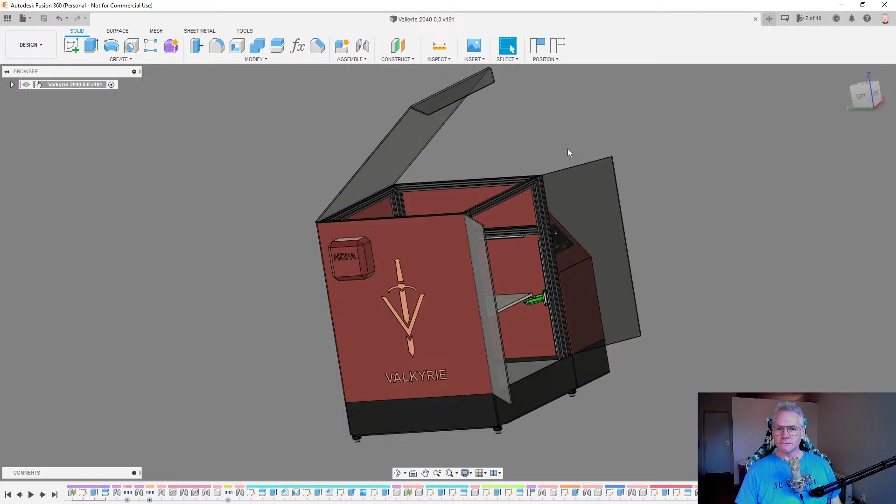We have been discussing, we can have a look at the CAD model. So here is the current CAD model. This side thing, cabinet, pod, or what you want to call it, is probably going to be a little bit different. The touchscreen is not going to be here. If we are going with a touchscreen, we need to place it like down here or up top here somewhere. Let me know what you guys, where you would like to have it. Also take into consideration cabling, cable management to the screen. We want that to be as clean as possible and as simple as possible.

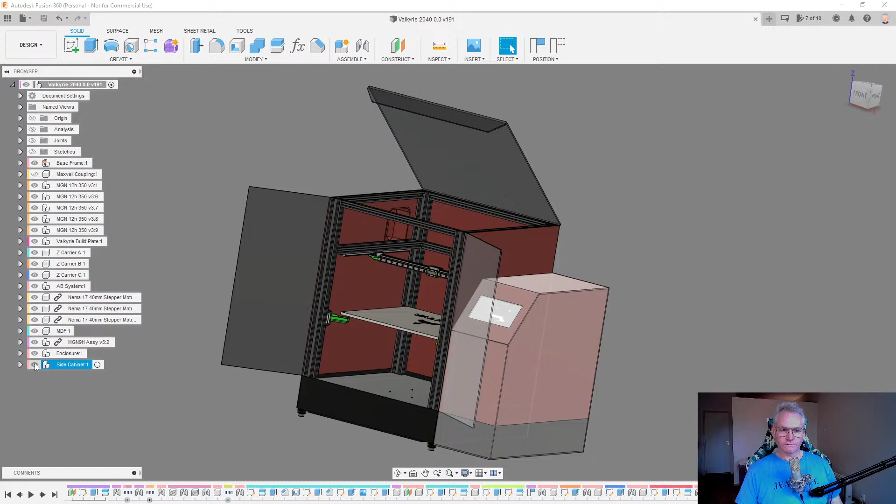So let me just get rid of the side cabinet for now, and also the enclosure. We're not working with that right now.

So this is what we got. I currently have in the bottom here an 18mm MDF. Comes out at about 3.55 kilos, which adds weight to the base of the machine, which is good for stability and also lowers the center of gravity.

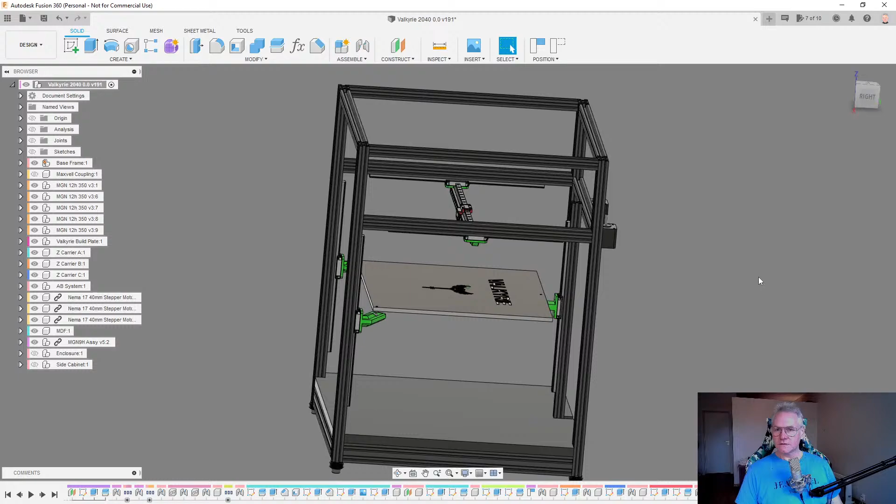So my concerns right now about this frame is the joining. We have been talking about joining, and the community have been asked to apply blind joints. We're talking about blind joints. We're talking about just basically a panhead screw inside here.

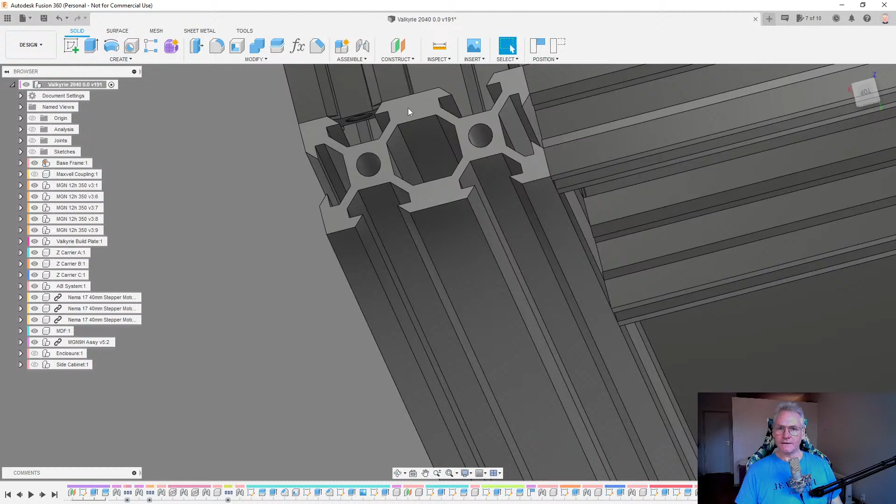I can add a screw so we can see it. It's more easy to show you rather than to try to explain. So let me find a screw.

Should be in, probably I don't know, I don't remember where I put everything. So yeah, here we have a M5. So let's do M5 by 10. Let's put that inside here.

Just need to do that actually in the frame. So let me activate my frame. And let's do like this. And I can show you.

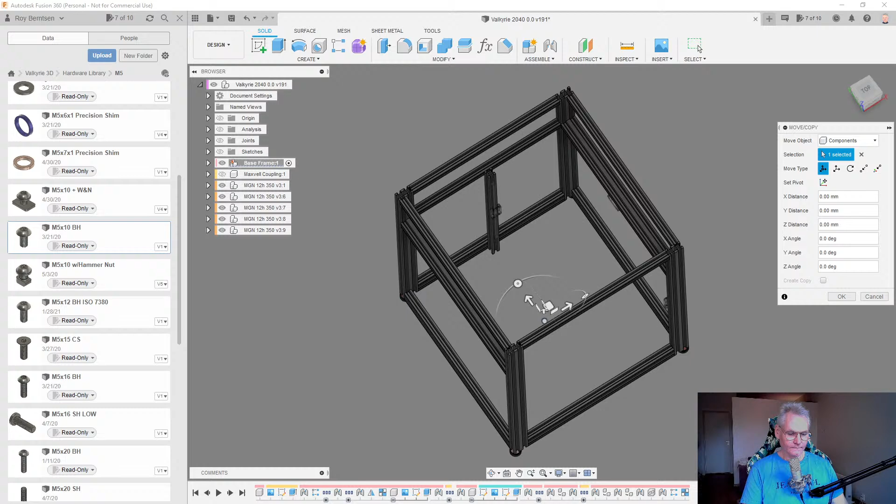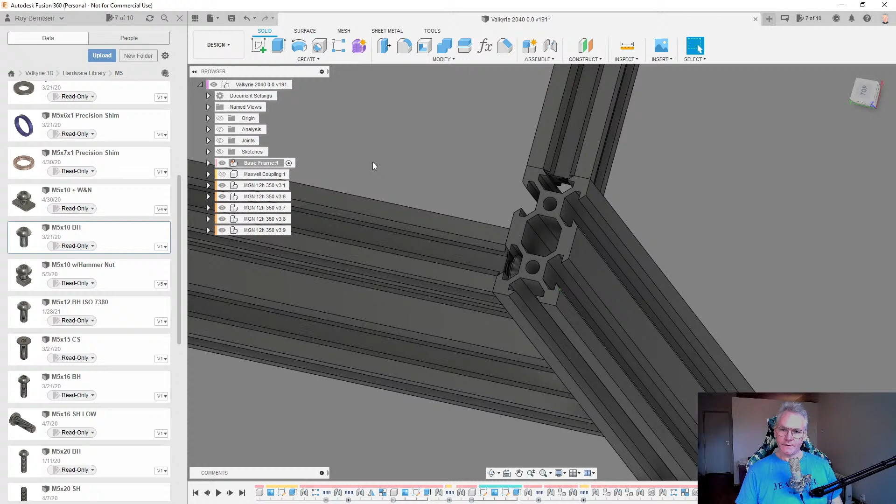So adding this guy to this guy here. Of course, it requires that the extrusions are tapped. And it would look like this. This is a typical blind joint with only just one panhead screw. We don't need a washer here. We could have a washer, but yeah, it's probably good without also. So it saves a lot of time doing this and a lot of hardware joining the frame like this.

But there are challenges. Mark Bridgewater from New Zealand just did some tests, and it's not perpendicular. It's not the angle is not 90 degrees with this kind of joint. It requires a very, very precise cut, and some say milling as well, to get this correct. So this was my initial plan. It was asked for by the community, but if it doesn't make the best possible squared frame, we cannot use it. We can maybe mix and match.

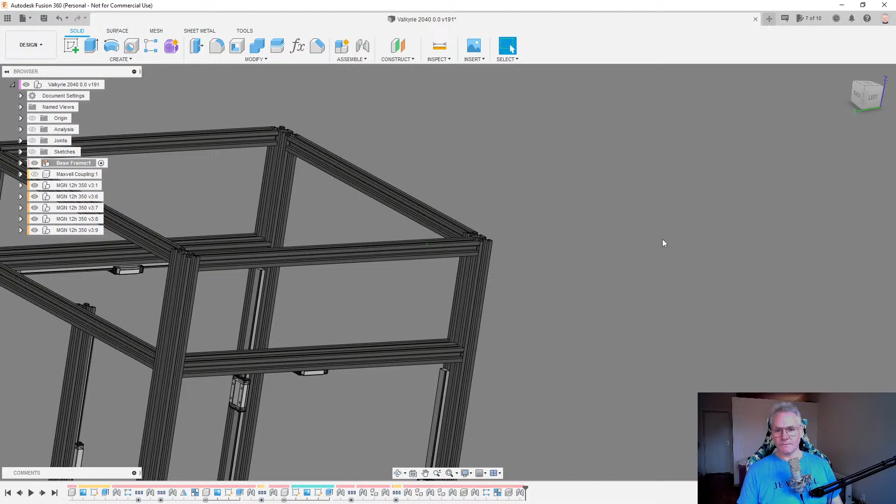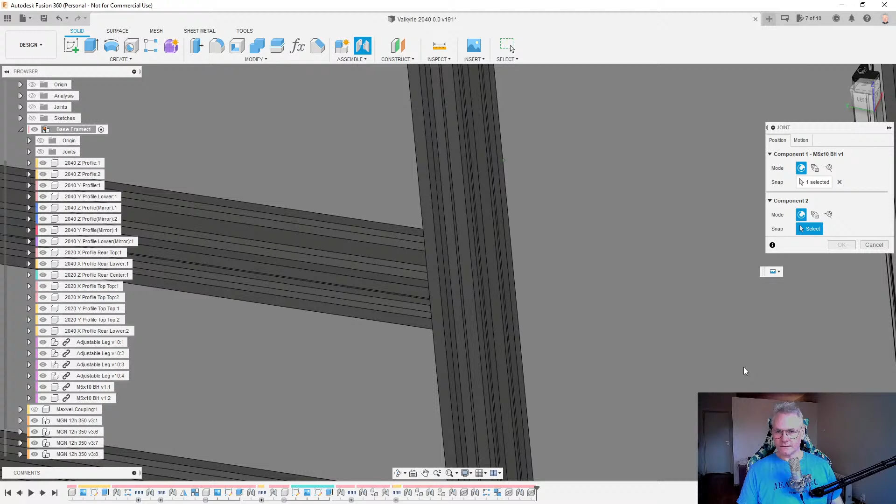Maybe we can use these guys. Let me put one more in. So let's just see if we do put this one inside here. Yeah, I cannot access that right now, so let me just hide this one and put the screw in.

Like that. This with two screws here in the 2040s, it should probably line up pretty good, but yeah, still we don't know. So let me put a bracket in. I'm not sure where my brackets are. Let me find a bracket.

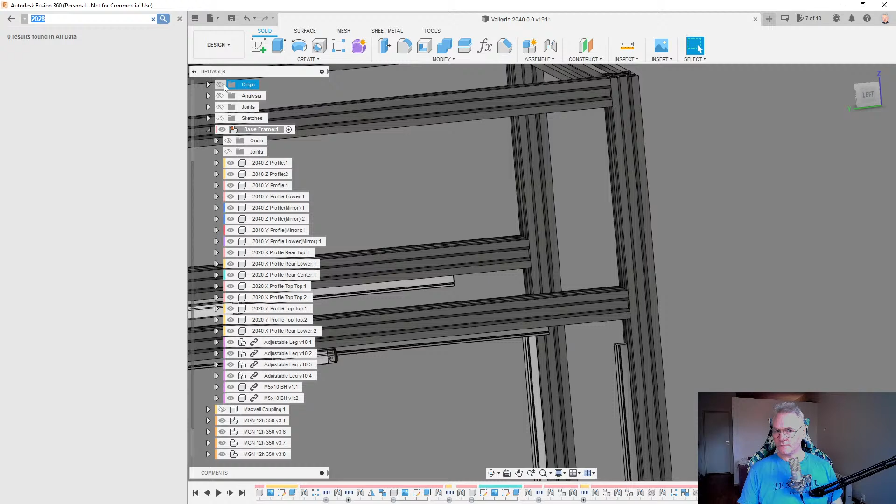2020. Okay, so I don't have those in this folder, this project. It should be somewhere else.

Here we have the 2020 L bracket. So I'll just copy this one out. Here we got it.

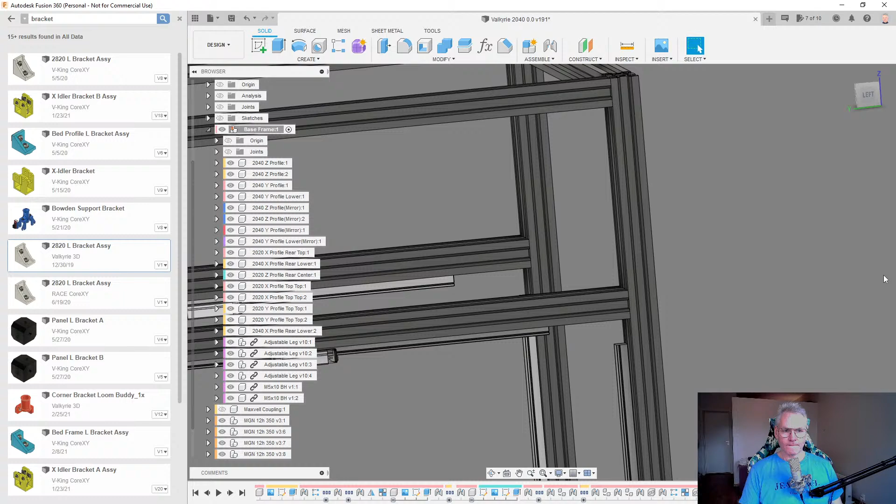It's all done as an assembly, so there's a lot more hardware going on here. We have the bracket, the M5s, washers, and the T-nut. Yeah, a lot more hardware, a lot more work, but I've used this before. This is my third or fourth 3D printer design, and I've been using these brackets earlier, and they have made a perfectly perpendicular, or as good as it gets, result regarding the frame squareness.

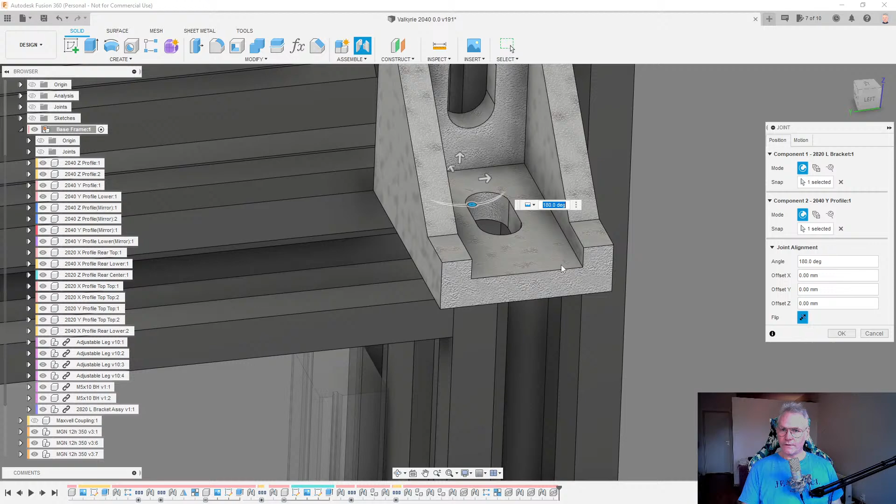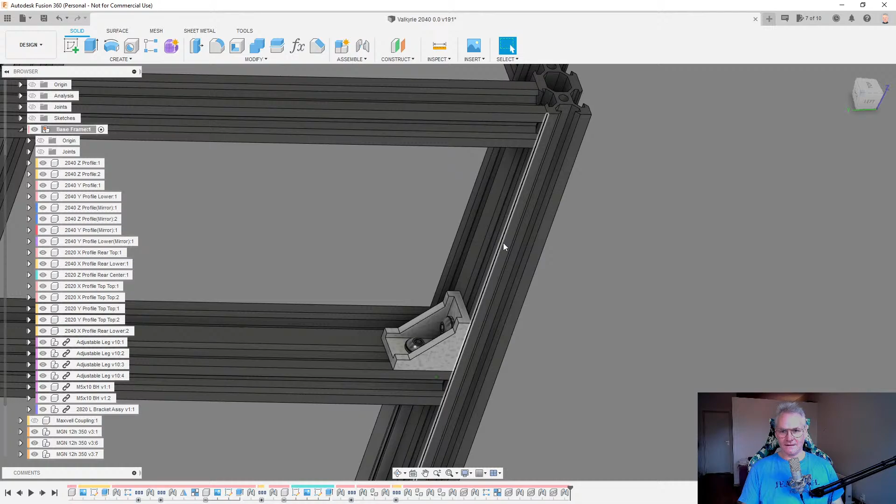So we could put these guys inside. Maybe just need one, or we could add two. I don't know, what do you guys think? This requires we put all the T-nuts inside before assembly, or we can suddenly not access to put the T-nuts inside, especially down inside here.

But Mark did the test with brackets like this, and the squareness was very good. It was like 90 degrees. So that's what we want.

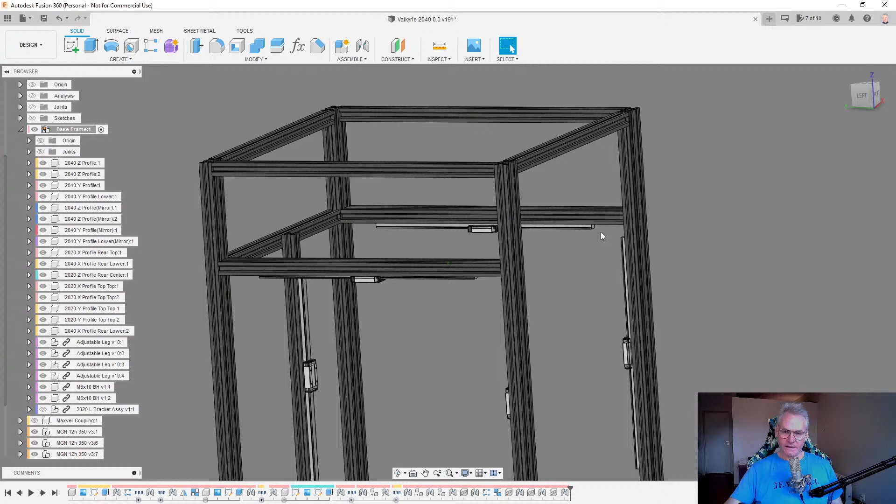Also, another issue I want to address is that we need the Y rails to be in plane with each other. It's not so important if they are skewed a little bit from the rest of the frame, they just have to be in plane. And then of course we adjust the bed so it's in plane with these guys again, and then we will have a perfectly aligned system in the Y, X and Z, which we need for a good result in our printing.

So what I want to do here now is move this bar to help align these guys, and I want maybe also to add another one. Let me just do that, and you can understand what I'm talking about. Also let me know in the comments what you guys think.

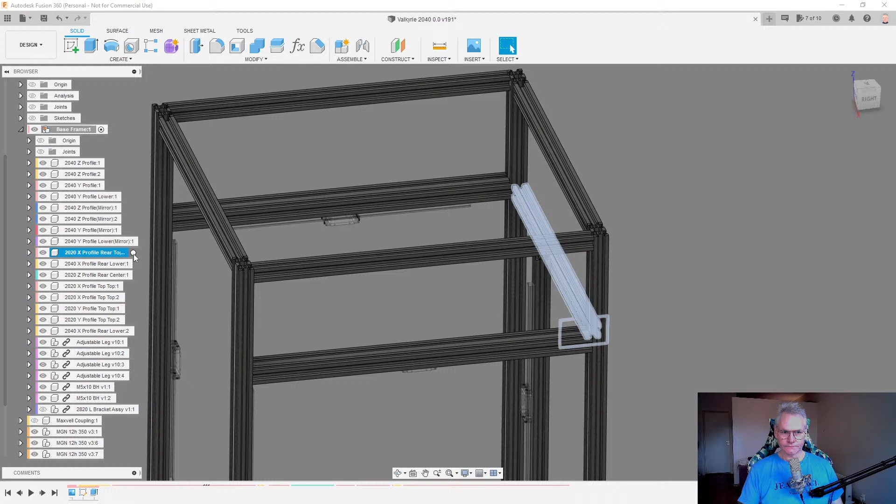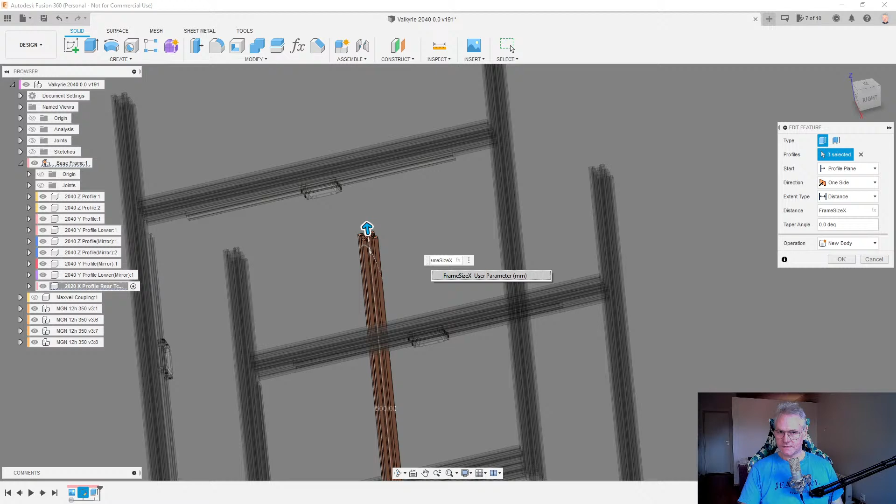So let me go to this rail, and I'm gonna make it a little bit longer. Currently we have frame size X minus frame profile 2. Should I get rid of this one? Yeah, it should have frame size X. Should do it for us, I think.

Yes, I just need to adjust the joint. I'm actually gonna delete the joint and add a new one. So let me do that right here, like pick this corner. And let me see where we are now. Yeah, we want this corner to be over here.

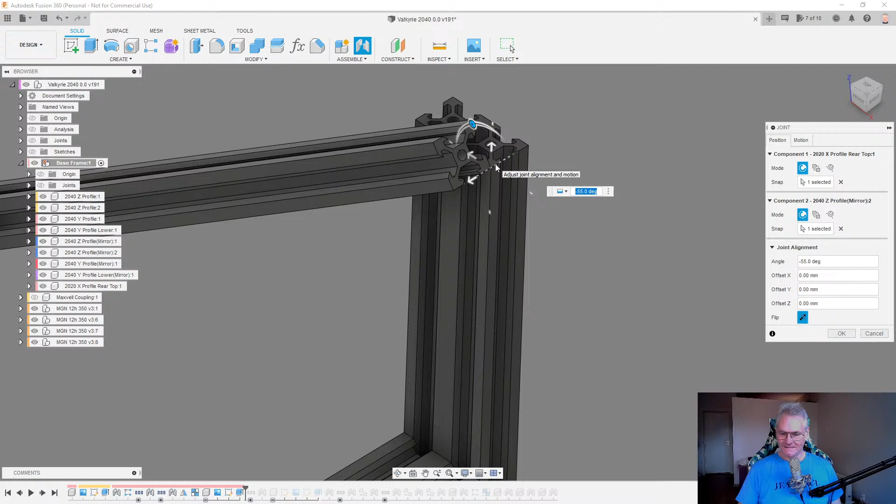Yeah, okay, so I need to address this corner up here, and then flip it like this. 180 degrees, minus 90. And then we need to lower this guy, negative top lid top height, like this.

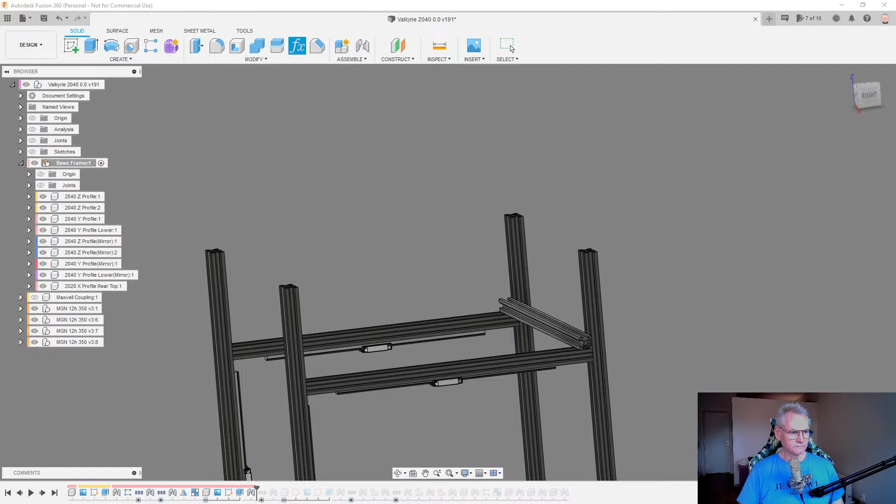So now if I change the lid top height, everything will align. If I go to the parameters and change this to, let's say, 100, you can see what's going on. So everything just changed, as you can see. So if we go back, it goes higher, but everything stays where it should.

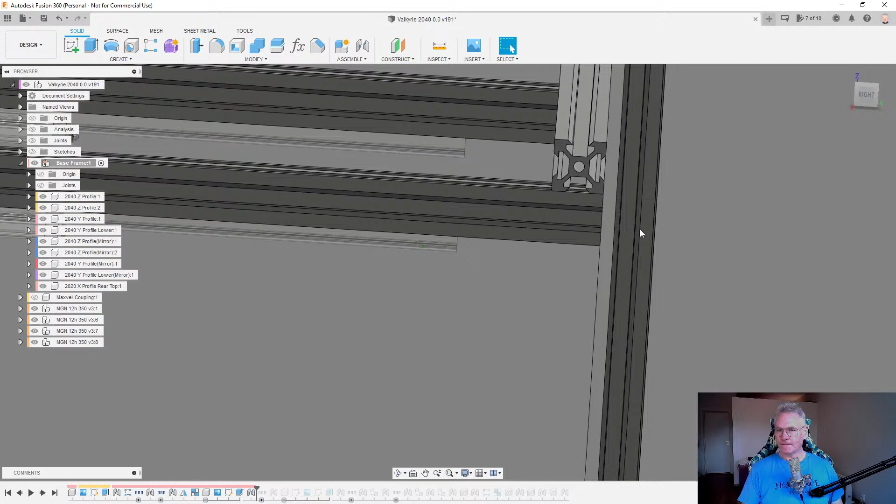So using this bar as a plane, it will keep this and that extrusion in plane if we use this one as an alignment tool, but also it could be like a bracket. And then maybe we can use blind joints here for this one into that one, and also at least we can use blind joints here from this one to that one.

Let me show you what I'm thinking, and then let me know in the comments what you think.

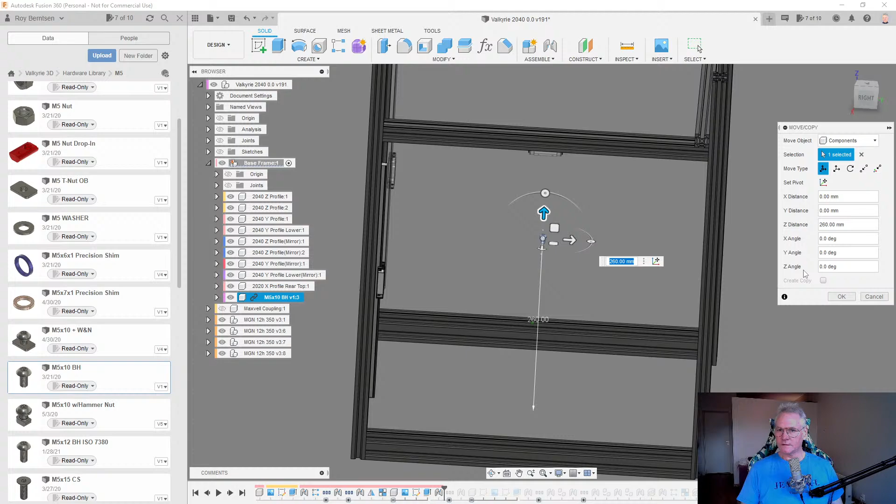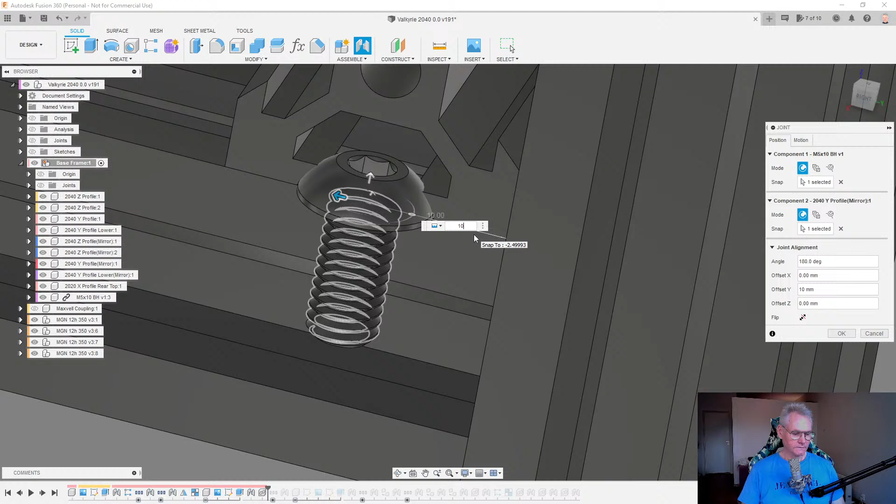Let's go to our hardware library and get the M5s, and just M5 by 10. 10 is probably maybe too long, but anyway it's just to illustrate. So let me put this guy inside and join that one. We can refer to this thingy, and we can go 10 this way, and then 10 this way.

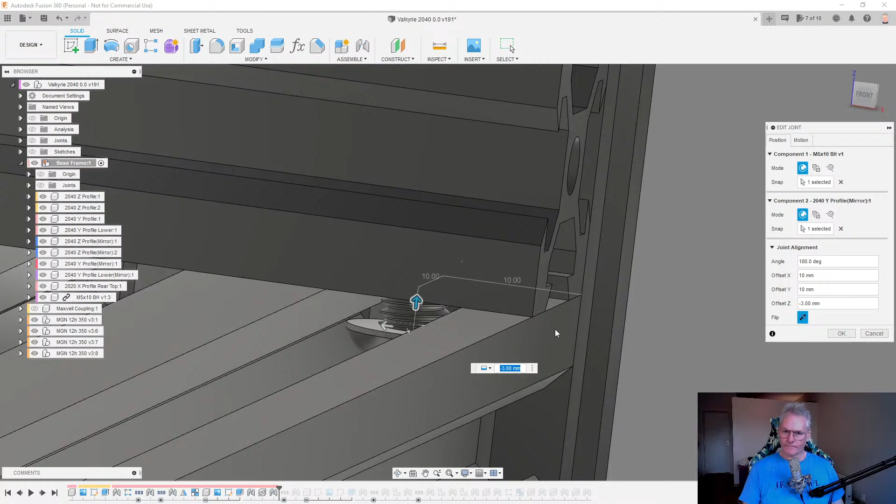So yeah, and of course then we also would need, we can also go from the underside here and up into this guy. Different options here. That's probably better, to go from the underside and up into this guy. So let's see how that could work. Yeah, -3 like that. As you can see now the screw is a little bit too long, so it would need to be like M5 by 8 or something.

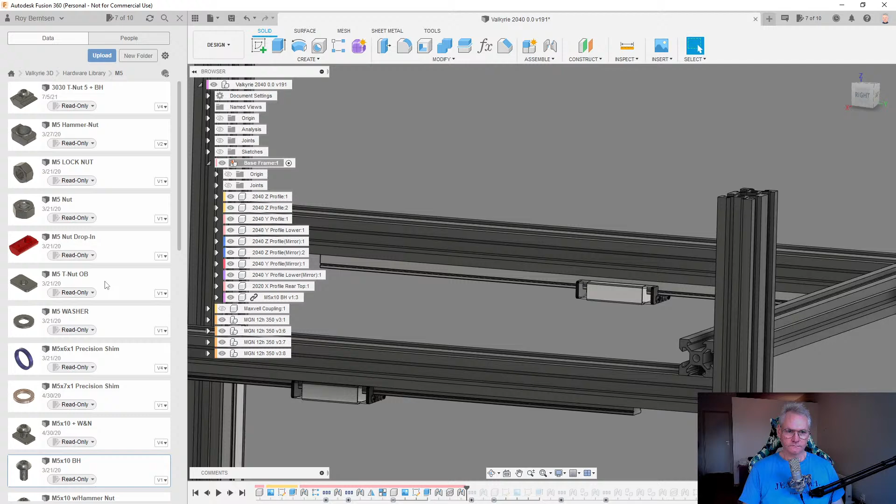And I can also put in, but of course this again is more work when we need to add the T-nuts. Let me add a T-nut. So these are OpenBuilds T-nuts. There are different T-nuts available, of course. You can also use hammer nuts, they are not as good, but if you are able to use T-nuts, then I would recommend that. And if not, if you forgot some T-nuts, then use hammer nuts. So adding this.

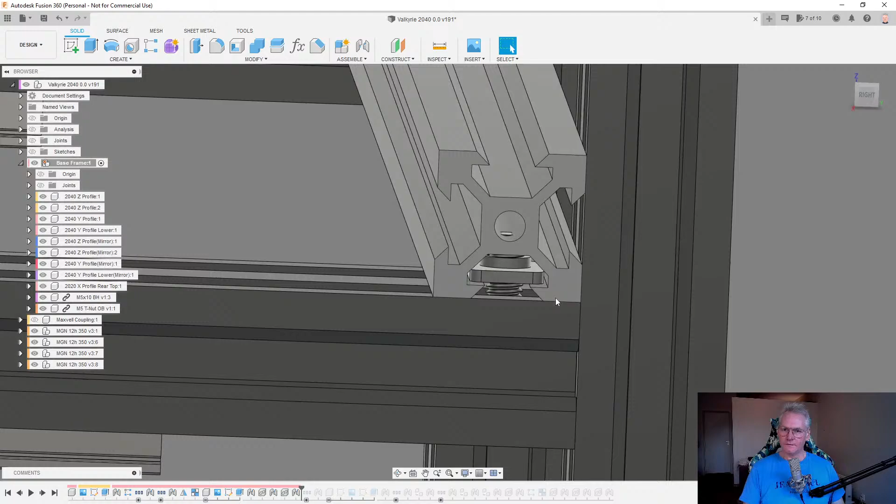Here, over here. Oh, it just needs to be flipped. So, like that. So this is an option. And if you do that, you know, two screws here.

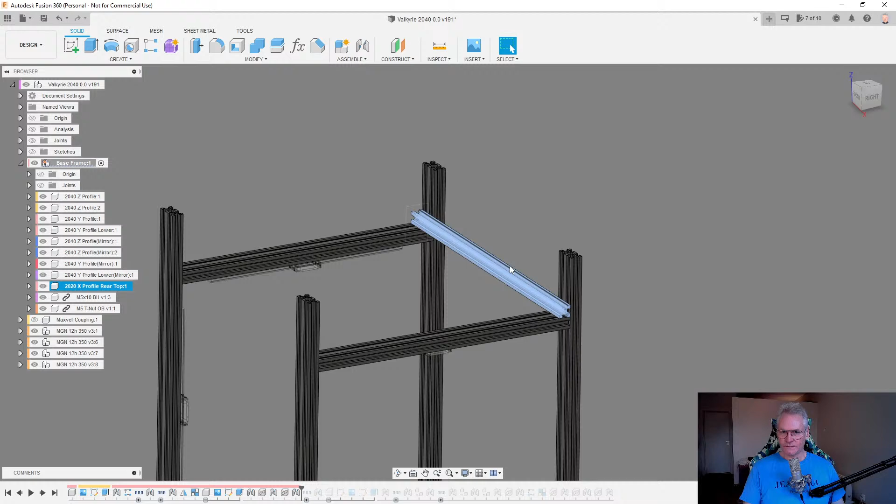We need to add holes here to access the screws, of course. And then this bar and that bar would be in plane with this one. And what we now could do is we could take this one and add even one more over here.

But this is of course good for the frame. It's not so good for accessing inside the printer.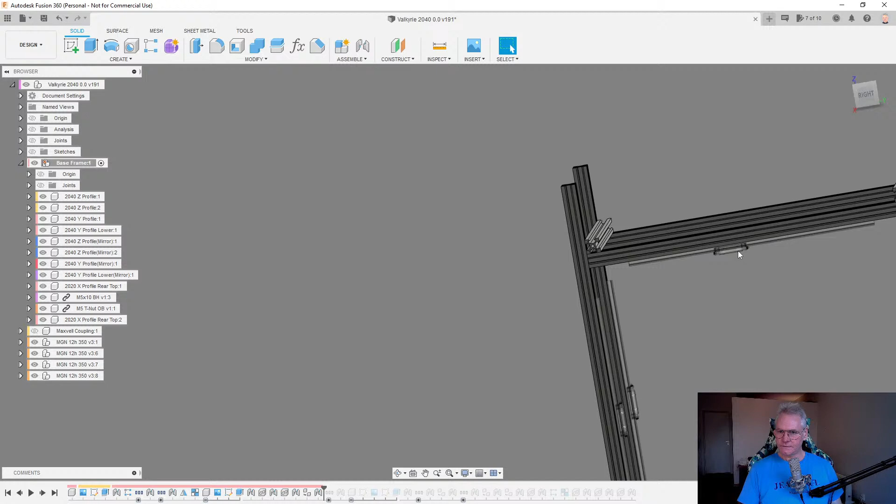Yeah, but of course the most important thing is to get everything in plane and rigid as possible. I don't think this will restrict our movement. We can have a look at that as well.

Let me now put in the rest of the frame parts. Okay, so what happened here?

Let me just see. Something weird happened here. Oh yes, of course, it's the Z axis. Let me fix that.

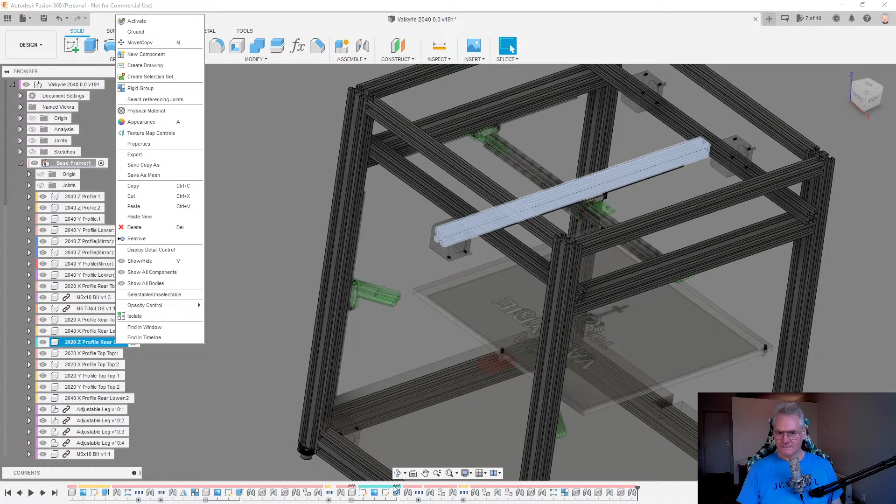Okay, let's see the axis. Trying to find, you know, there's a lot of components inside here. So you can see it didn't line up as it should.

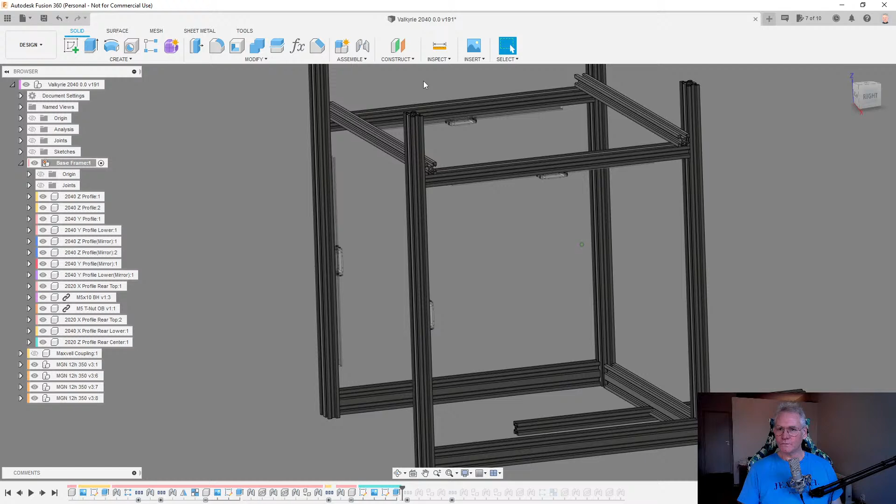Okay, so I need to get rid of this joint, I think. And then let's join it one more time somewhere. Maybe we should join it to the lower bar.

Yes, it did look like a cross gantry. Maybe we should build a cross gantry. What do you guys think? Should we stick with the CoreXY? At least this machine is gonna be CoreXY anyway.

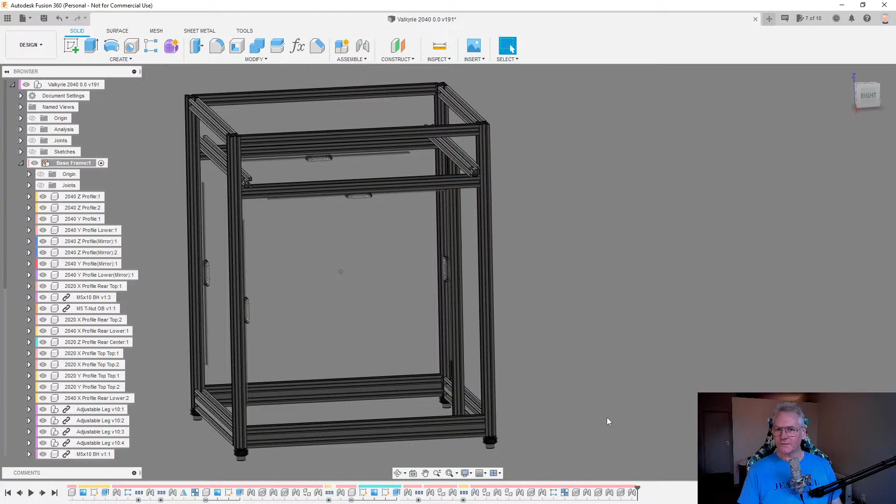Like this. Yeah, so this is how it should be. Now it's correct. And then again, we could use blind joints from the top here and down into this extrusion. This one needs to be tapped, of course. So again, I can show you what I'm talking about.

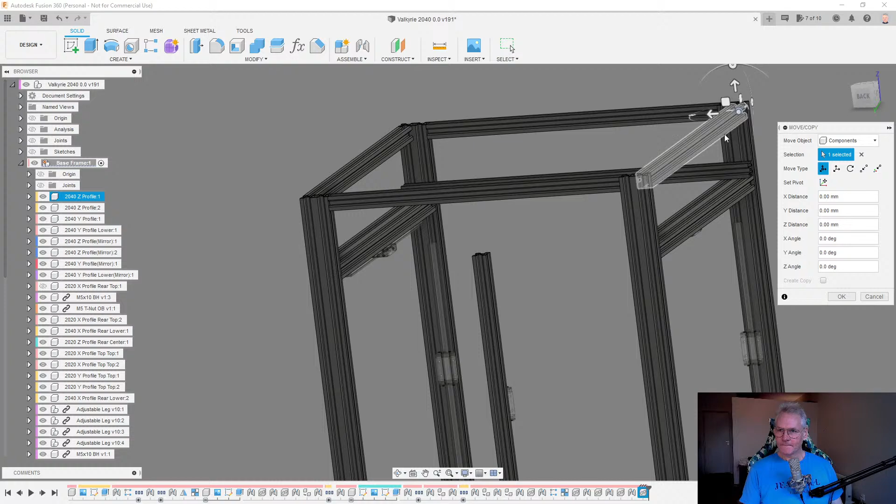Tapping this. And activating this one. So now we have a very good joint here, or maybe not so good.

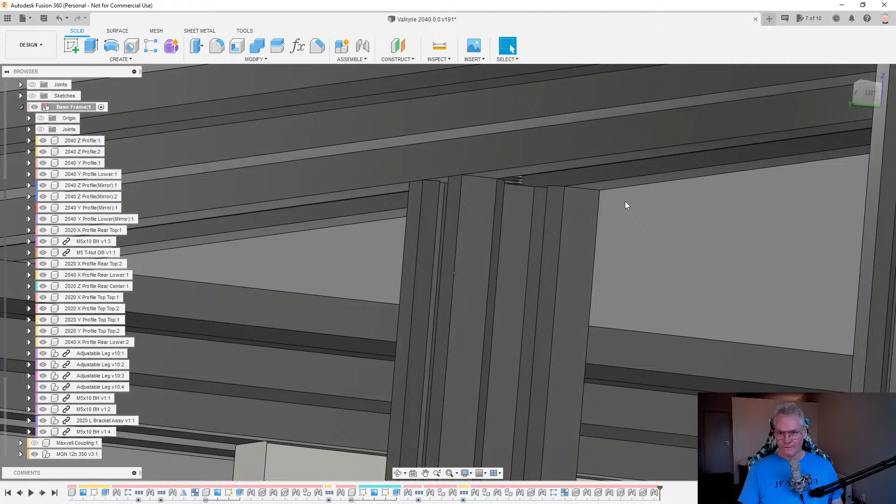It depends if it's perpendicular or not. As to Max's test, it would not be perpendicular. But I think this one will act like a bracket, so I don't think we need brackets here.

Using this one, that one, and this one. And also, if we need, do we need this front brace here? I think we still have good access to the machine. We can put in the enclosure and see.

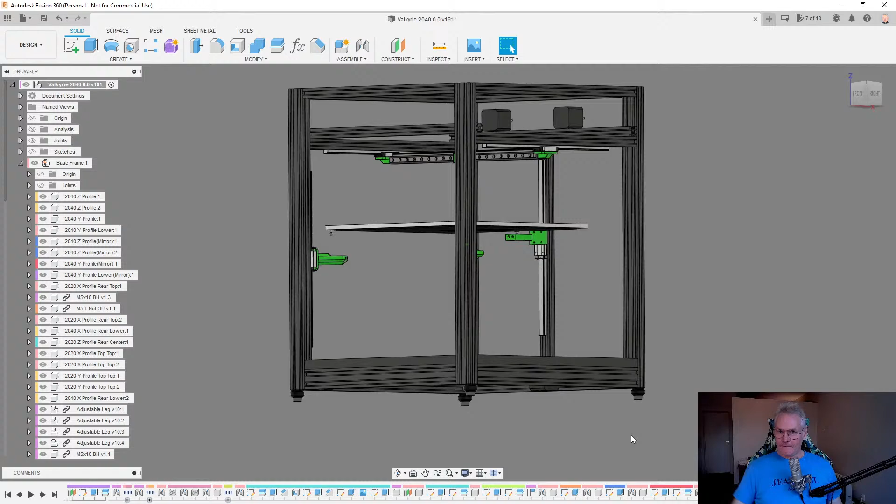I hope all the joints now are in order. Okay, something happened here. Yeah, I need to move this one a little bit down, or these guys a little bit up, but that's fine. Just a brief adjustment.

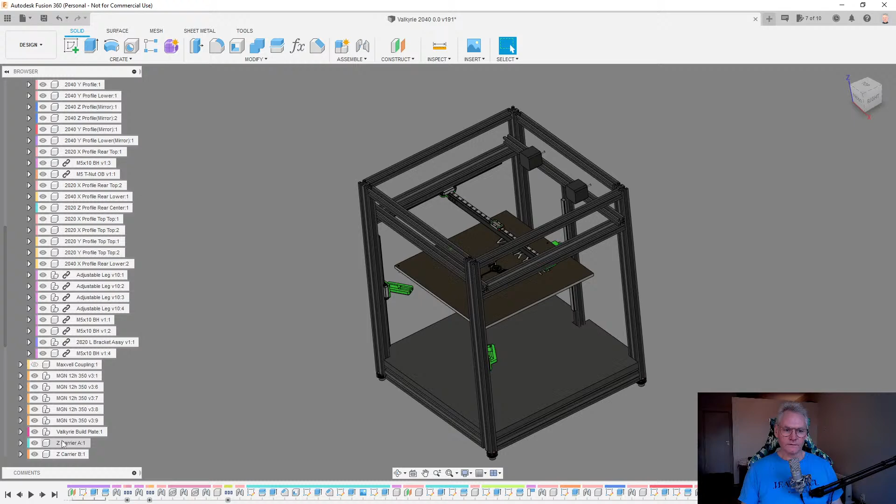So let's have a look at the enclosure. Yeah, I don't think this front brace, or bar, I don't think it's too annoying. What do you think, Mark?

Should we add this thing to get the Y profiles in plane in the best possible way? Should we have this one only, or both, or do you have another solution for us?

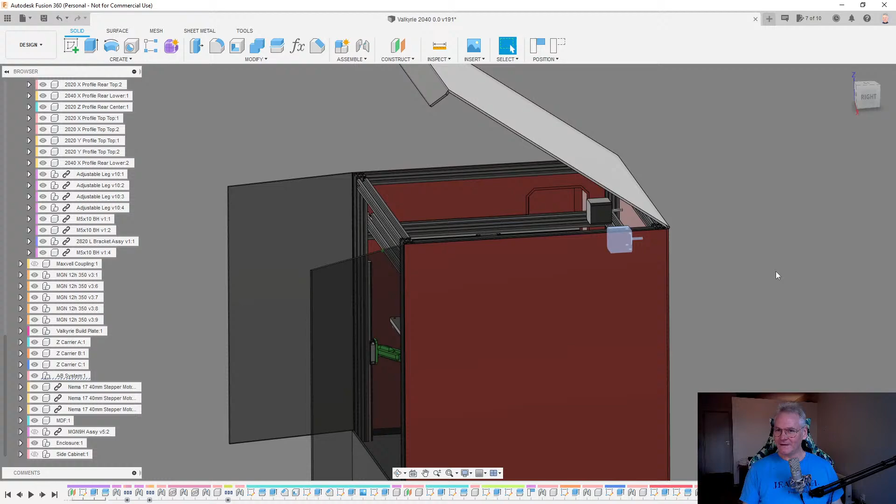Of course, the stepper motors should be outside. I don't know how they ended up inside. Yes, it's because I turned this around. That's why, because they are joined to this one, so they should be outside. We can do that real quick.

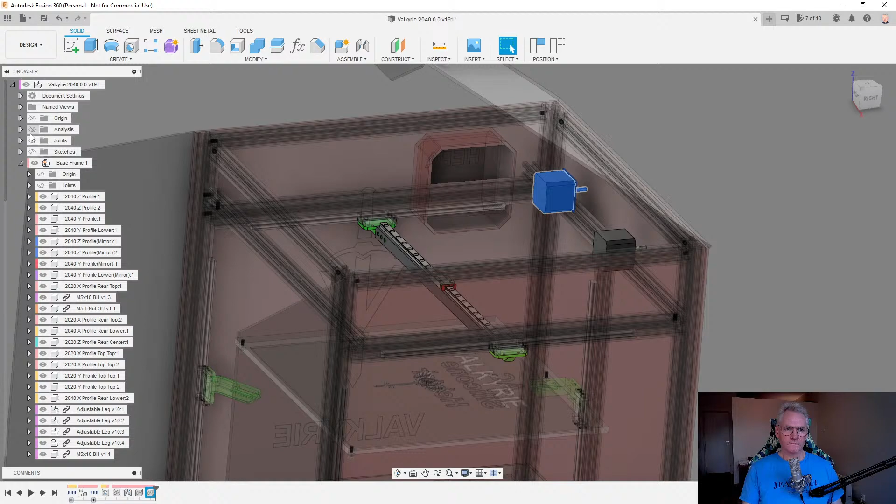So we don't get confused. Just need to find it in the timeline. It's not always so easy. We have it over here.

Yeah, the best is probably to just delete that one. Let's just add it once more. It's not so important at this point, but...

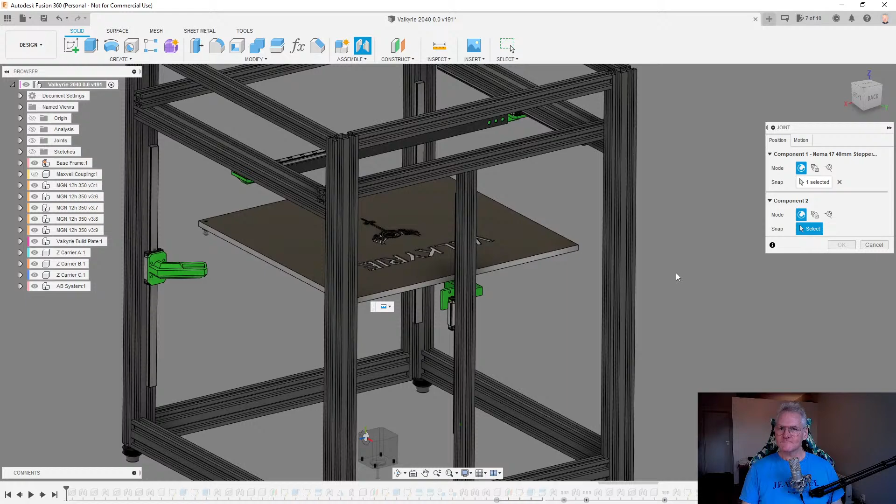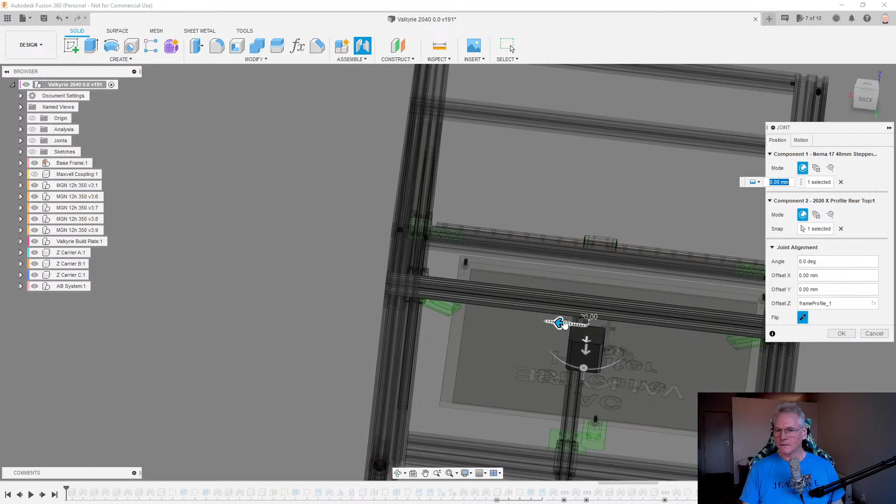Just bring it to the side a little bit. Something like this. And then the other AB motor.

So these are called AB motors. That's because they work together in a CoreXY system. We don't have an X and Y motor. You can call them X and Y as well, that's fine.

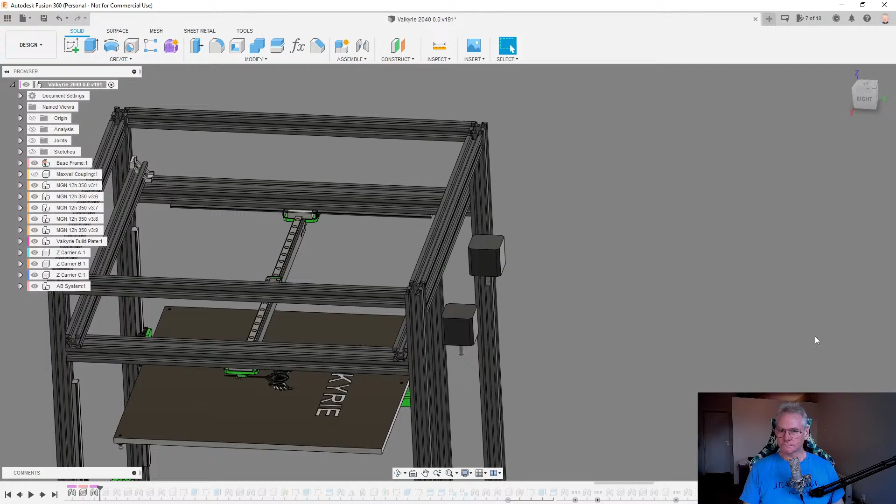So as you can see, while I'm working, I'm using parameters as much as I can. Yeah, so they can stay there for this. I also just recognized that this one is too far to the side. It's not in the center. So I'm gonna fix that one.

So it is this joint here. So it should only be frame profile divided by 2, like this.

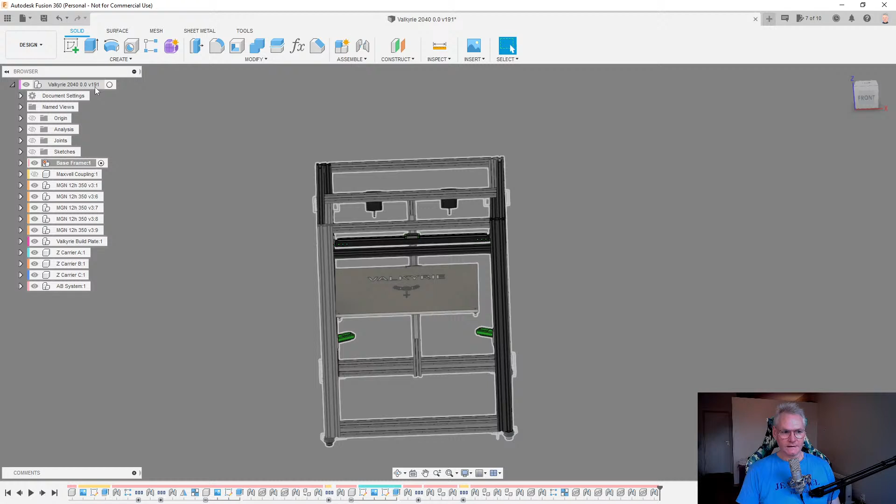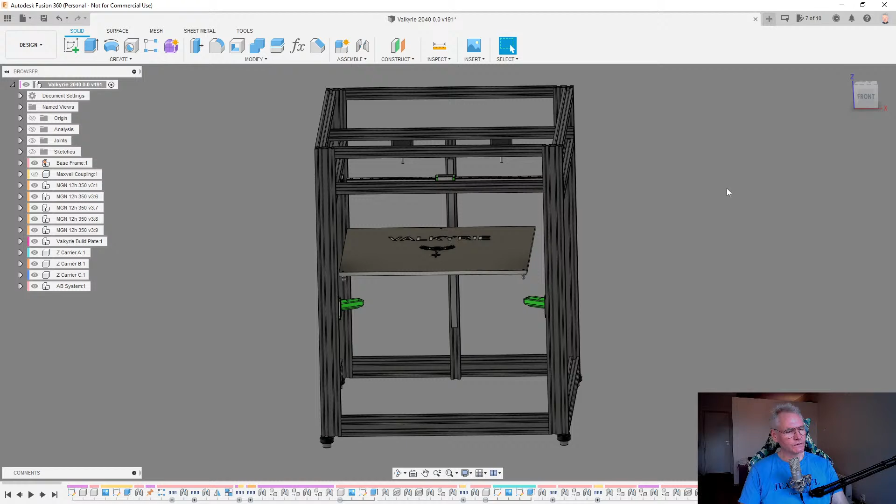Martin is asking why not use high temp motors on the inside. That was not really an option for us. Do you have a link to some high temp motors? What's the price? What's the accessibility? What's the temperature range and whatnot? I would like to have them on the outside. I don't see any point having them on the inside, but you might change my mind.

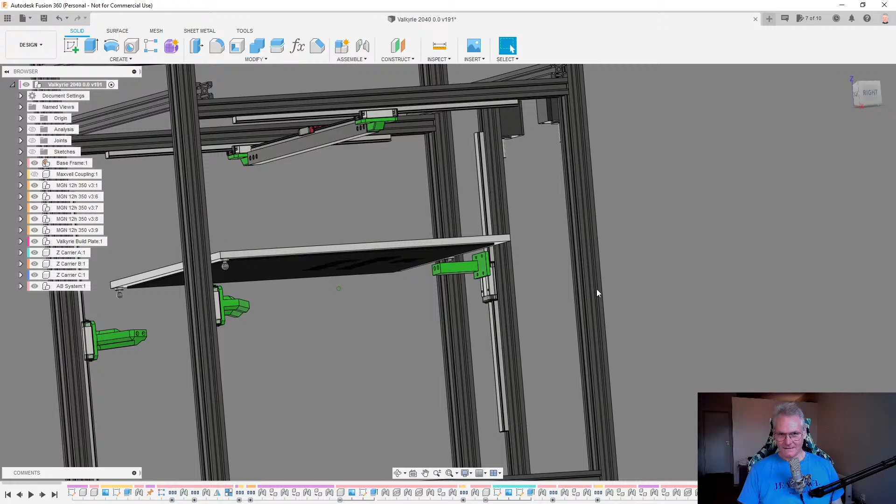So something happened here now. I'm not sure what happened, but something is off. I need to fix that later. Sometimes when you do a lot of changes and you don't make the right joints, and when you delete some joints and add a new joint and maybe you twisted something, then stuff like this will happen. But it's an easy fix, I'm not gonna use time on that right now.

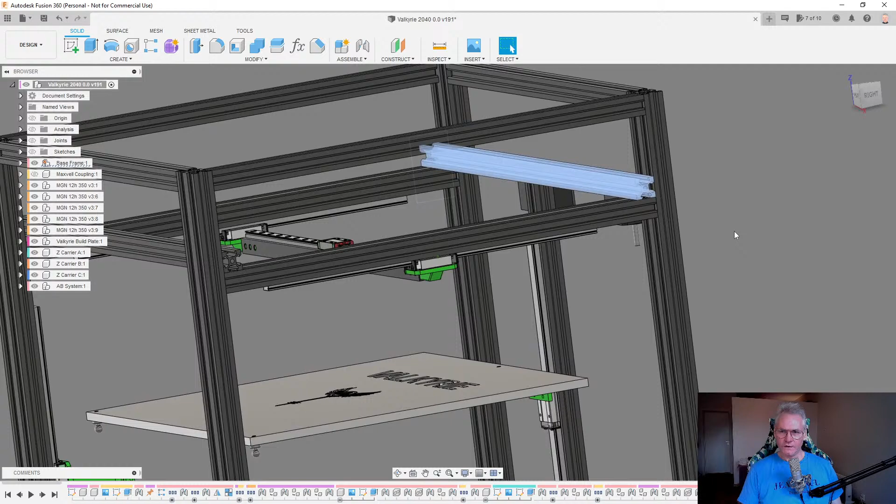We are focusing on the main frame. So let me have a look in the comments. Maybe a temporary for the build and then remove. Yes, we could do that.

But yeah, the rear one, we need one here anyway. We need one for this guy. Or we don't need one for that guy, because this one could stretch all the way up to the top. And then we could remove this one, but I feel like, how much weight is this? Let's have a look at the weight of this, because it of course adds weight to the top.

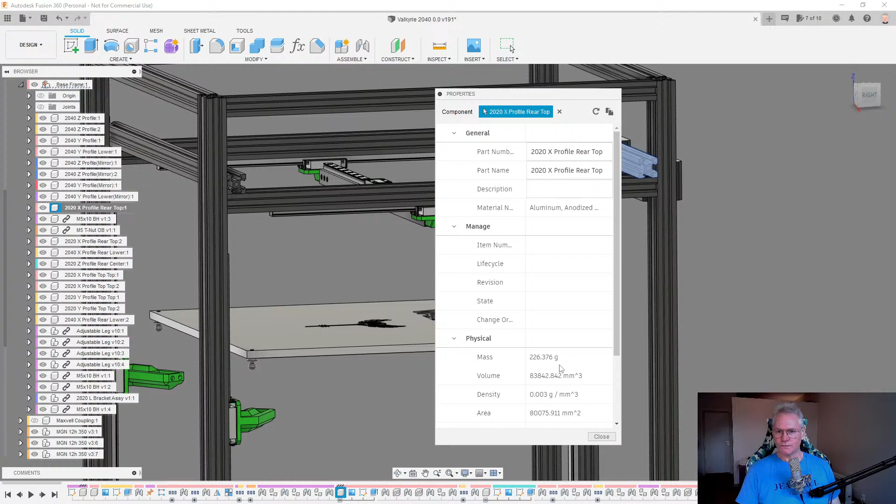If you have a look at the properties here, physical, it's 226 grams. So it means if we add 2, then we add half a kilo to the top, which is not good.

So maybe you have a good point there, Mark. Maybe we should just use one of these to align these ones. Let me get rid of this one. Just the front one, yeah, but still we could now. Of course, we need this rear bar for our motors. So this one we need anyway.

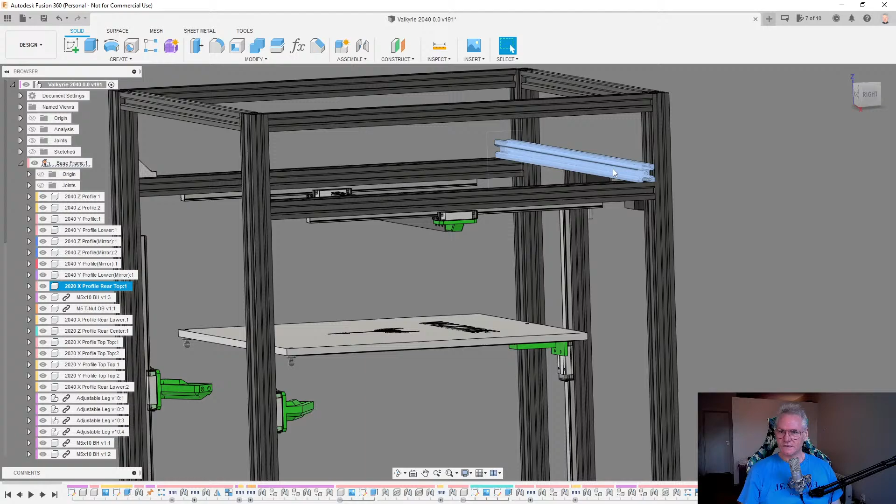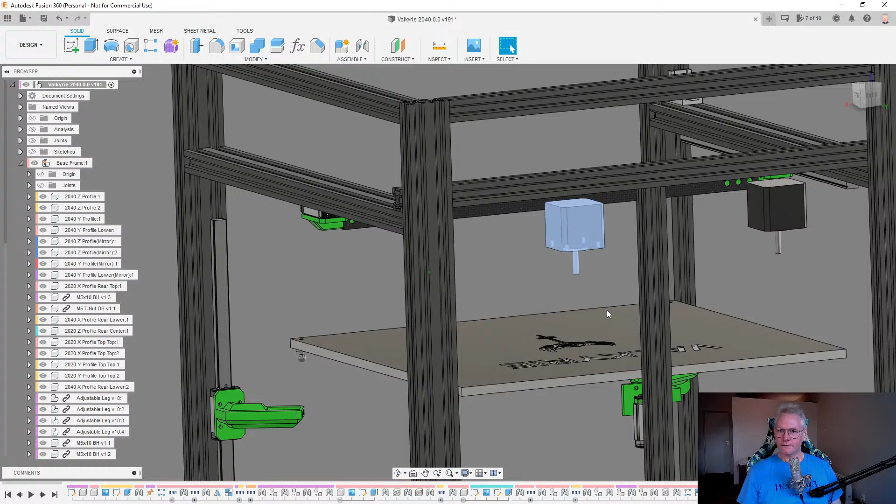We need to be able to attach the motors somewhere on the backside here, and they need to be placed approximately where I have them right now, because I'm going to do a special belt run with some tensioners and stuff, so they cannot be on the side. We need to place them on the side here for something else. So we need to place them around here somewhere, attached to this guy here.

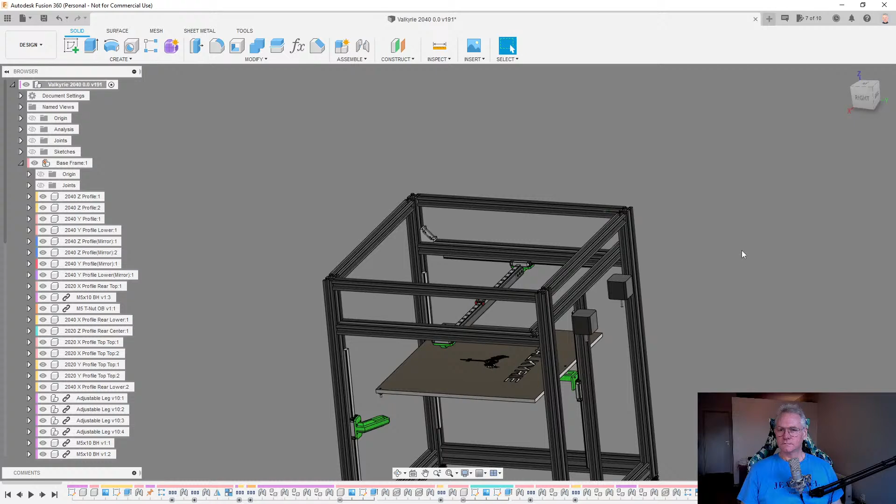Yeah, so we could use just a temporary one for the front to align everything. I'm not sure we need it. I think that this one will align these guys, get them in a plane, and then adding in the corner brackets, we should be good, I think. Let me bring back the front thingy, the front brace.

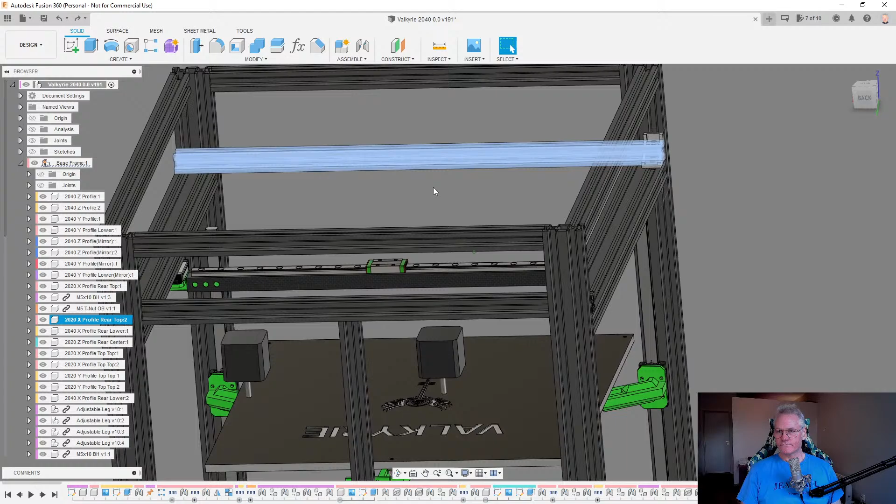So yeah, we could use this as a temporary thing for adding. Maybe we should have, let me try one more thing now. If we do this one, let me make this a little bit shorter. Frame size X minus profile 2, so it removes 40mm.

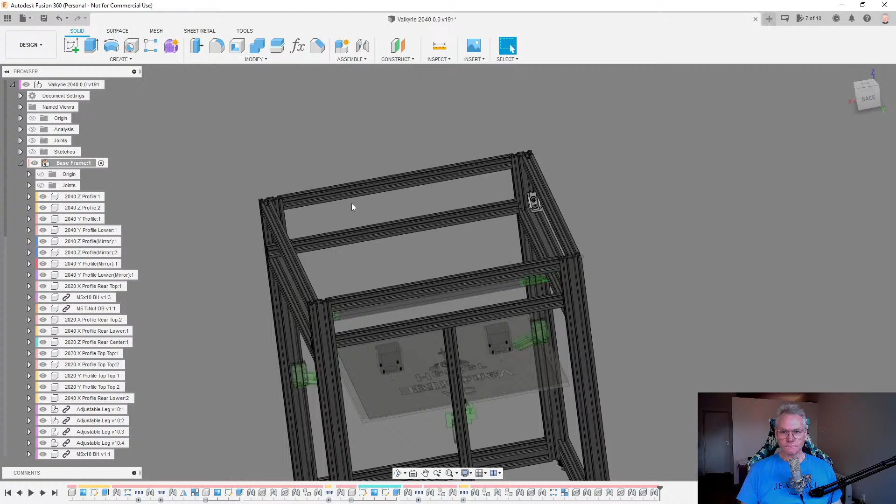LDO. Yeah, for motors, I was thinking about, because I don't remember who did this test on motors, but E3D has some 0.9 degree steppers, which performed very, very well. So I'm open for suggestions on motors, of course. Please leave us a note for suppliers and or the links for products. We need that.

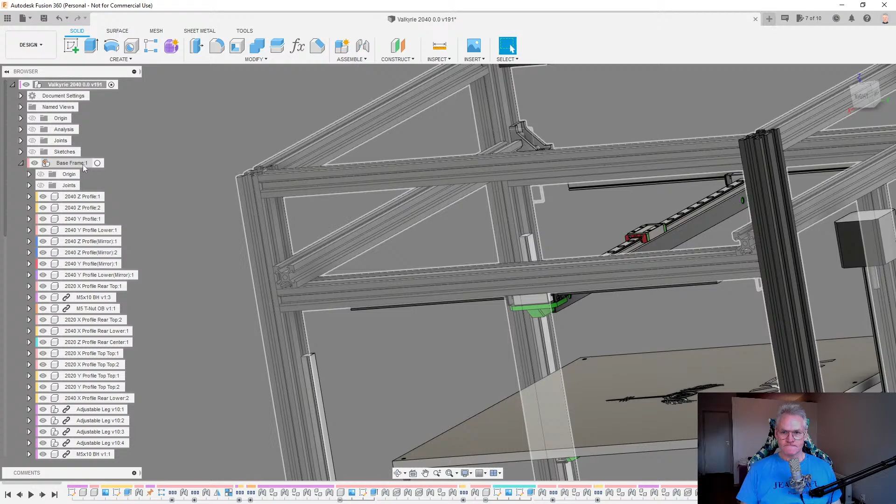Let me now just find this one. Finding timeline, not always they show up. Huh, strange. Here it is, probably, yeah. It's over here.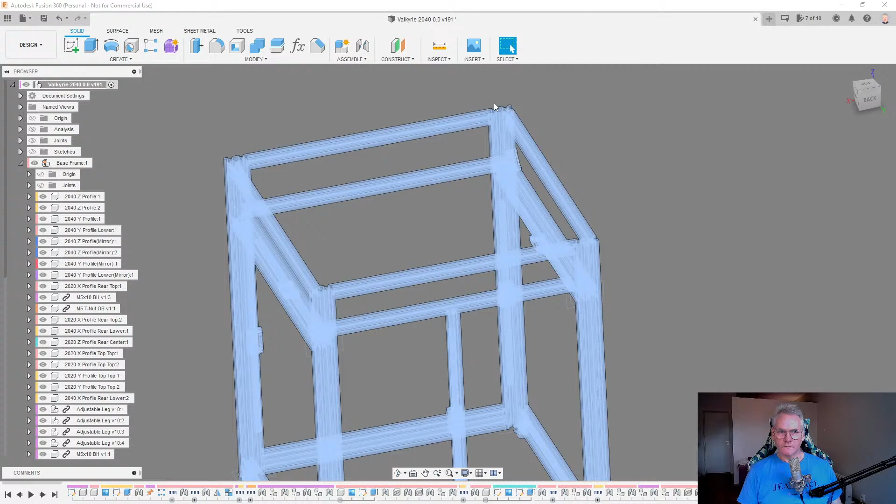So let me bring this a little bit to the center now. So negative frame profile 1, like this. Because then we could have a bracket on one side here using 2040s. I know Mark is building 3030s, but I wanted the stock frame to be 2040s and 2020s, some 2020s. Of course, here we have a 2020 also up top here. And then these guys on the top here, we don't need them. Or do we? It depends on the top lid. I can come back to that just briefly very soon.

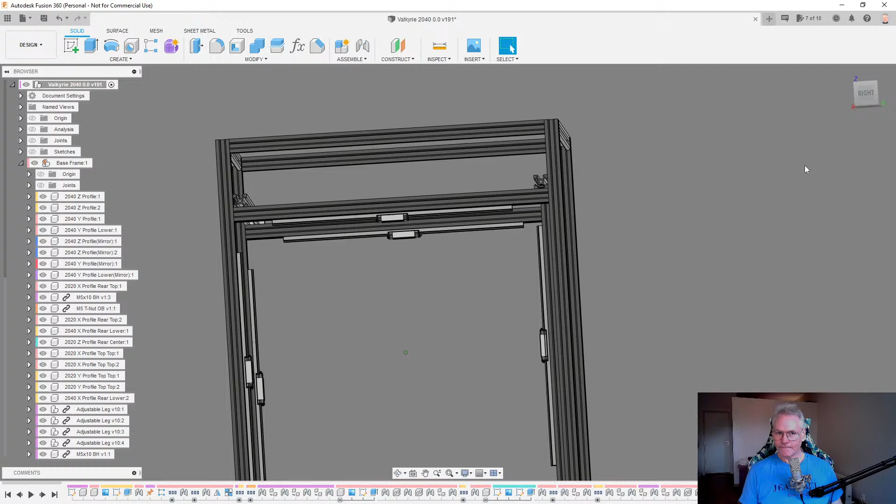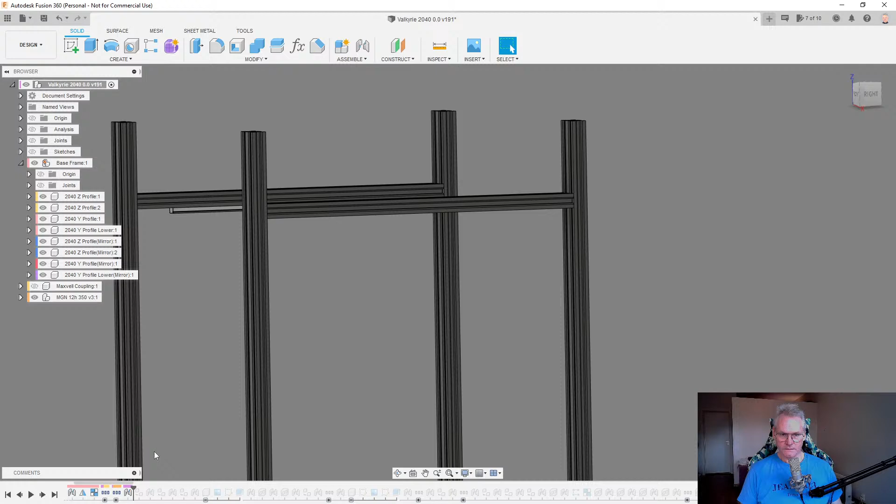Let me bring this one a little bit down. So let's find that one. As you can see, it's not always they show up. Yeah, here we go, it's probably this guy. So we probably need to go down 20 or 40, I'm not sure. Let's find out.

Let's find out. It's still off. Let me figure that out later.

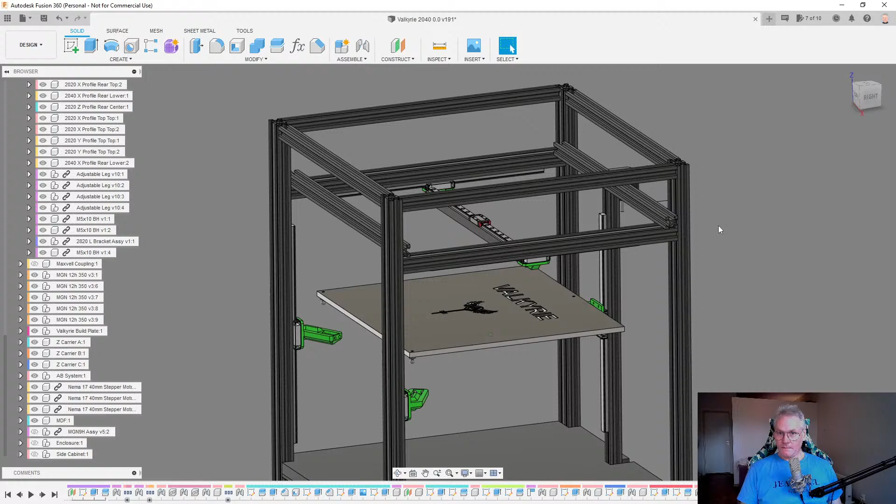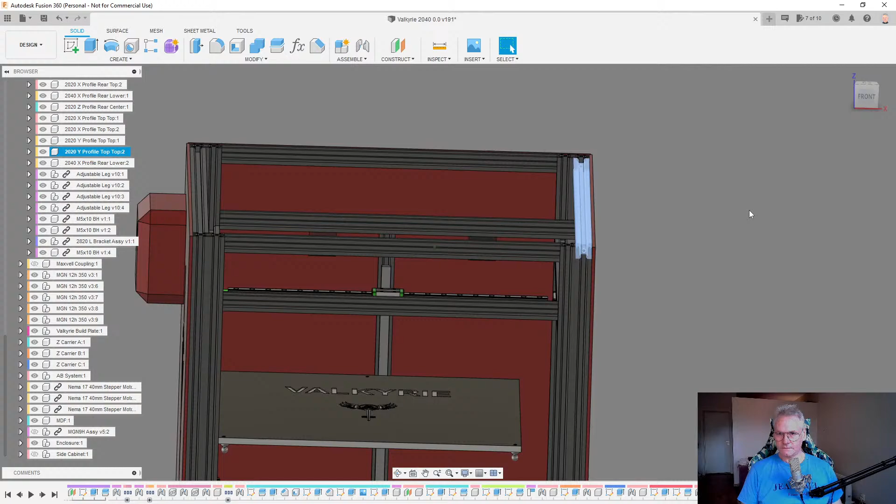Let's add the enclosure and talk about the top rails. Let me hide this one, and also these guys, because these are now not really needed, except for the lid. We need the lid to close properly, we need to have something to close to.

But should we just remove it? It saves some weight up top, and it will help center of gravity. So if we remove these guys and add something else to the panel, which the lid can rest on, and make everything tight, that could be an option as well.

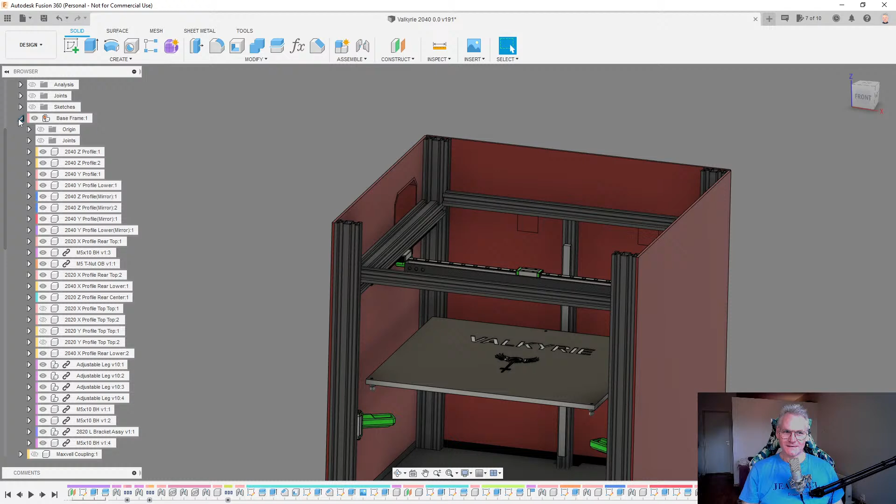Always new stuff rises when I start doing something with the design, then another issue comes up. What do you think? Is this enough for our lid to close on?

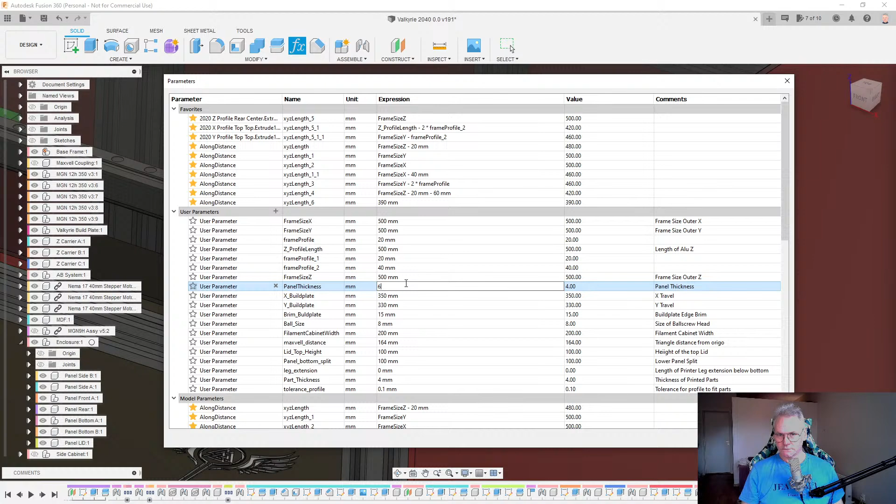These panels, of course, could be thicker. They are currently only 4 millimeter, if I remember correctly. I have that in my parameters as well, panel thickness 4 millimeter, so that could be maybe 6 or more. Depends on our supplier, of course, what they have and what type of panel we are going to use. It should be some high-end stuff, or not too expensive, but they should look nice and have good thermal properties.

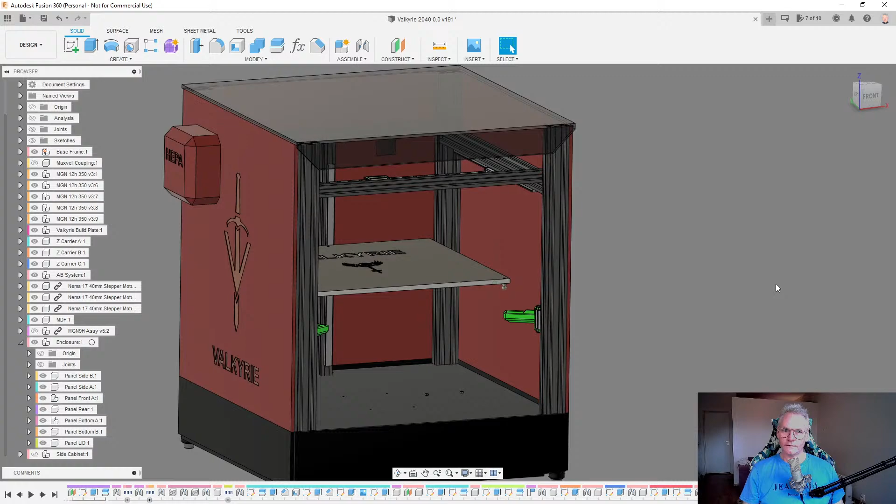But yeah, is this enough? Do we need the top rails? We can save 1 kilo now up top here by removing those rails, and it will be really, really good for the center of gravity.

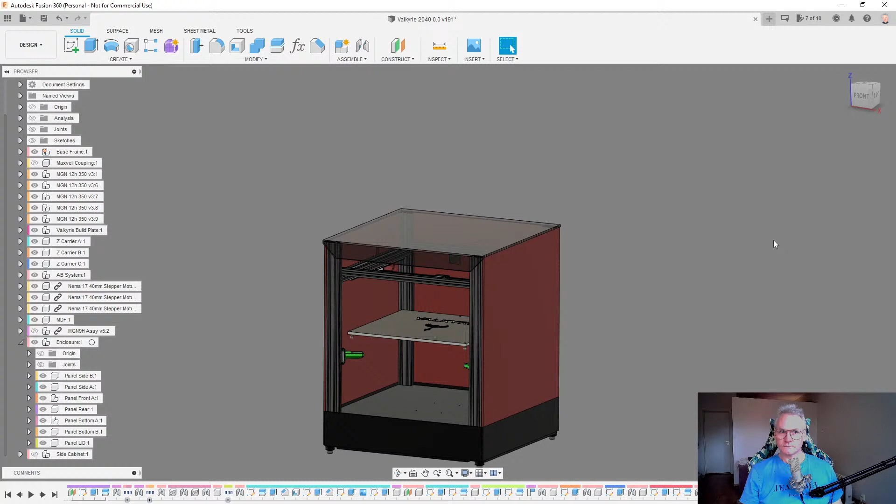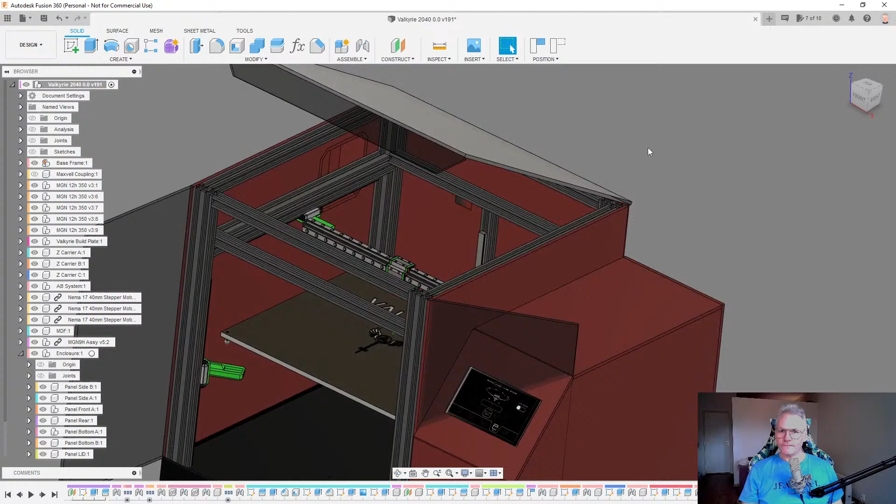Still need the front top one if we use the other as a setup. Yes, now we need this one, of course. I think I'll just order all of them, and then as we prototype, we can figure it out. I think that's the best idea right now. We cannot figure more things out in the CAD model, we need to figure it out by prototyping. So yeah, that was my thought for now on this.

Moving this one to the top here. Now it's only got too short here, but it's gonna stretch all the way over here, or maybe just to the middle and then use brackets on the side here. That's probably also a good option, or maybe it's too much. We just have to start prototyping and then we'll see.

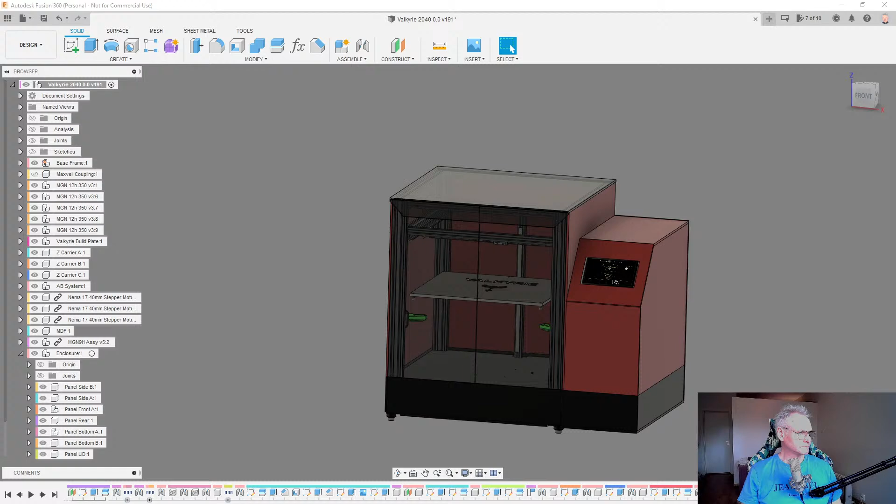So LDO motors has been mentioned, good up to 130 degrees Celsius it says, and a high temp version is good up to 180, it says. Let's have a look at the LDO motors. But anyway, I would like them all outside. Maybe outside is too difficult, and then if we can go inside, that's also a good option, with the high temp ones.

Printed brackets, no, Maker Viking, the printed brackets is not an option. We are looking at high temps inside this enclosure, so printed brackets will first of all not be rigid enough, and they will melt. It depends on the material of course, but yeah, we want some metal stuff inside there.